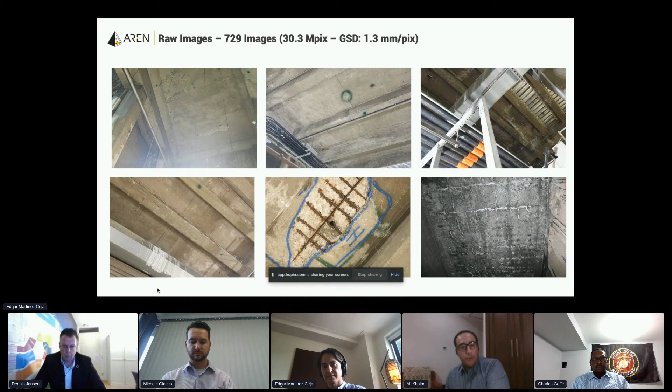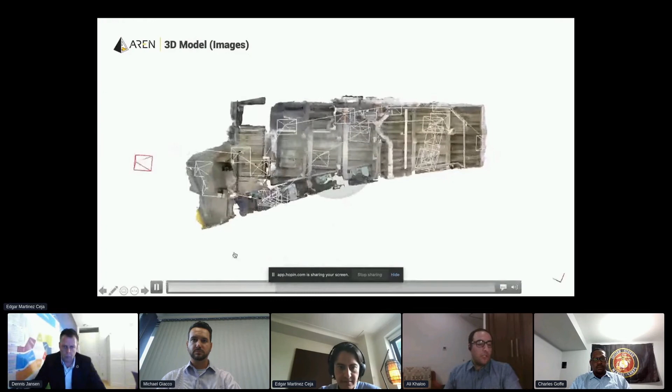So that's 729 images, which, again, as Mike mentioned, by themselves are decontextualized. You don't know where you're looking at. What you're seeing here is taking that information and creating a highly detailed 3D model of the asset. And now you know exactly, for example, where is that crack map on the asset, or where is that spalling on the asset. Now you know exactly what is wrong on your asset.

And then the next thing, as we mentioned, we are able to use different data sources just to create a more complete 3D model.

In this case, we used the laser scan data mixed with the images and created this 3D model. Upon creating these models, the next step was to apply our artificial intelligence technology to detect different damages and see which are in fair condition and which are not.

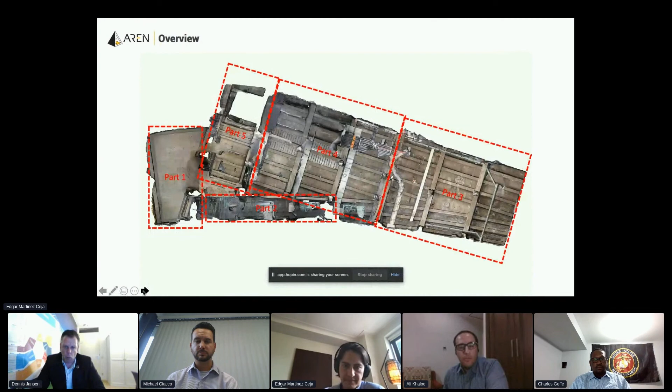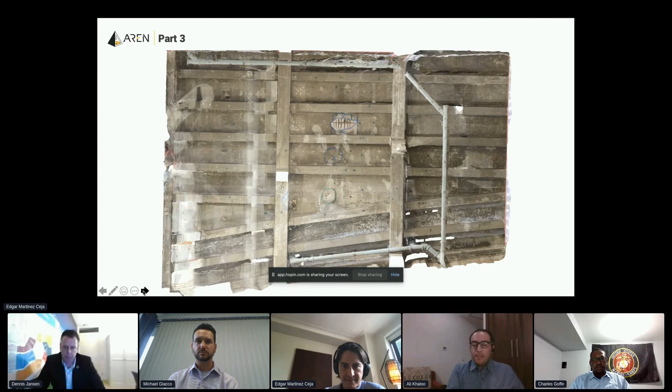In terms of how we deliver this to the client and asset owner, after creating the models we create these orthomosaics. The reason is that the final report is in PDF, it's 2D, so we need these high resolution 2D images that you can put into your PDFs.

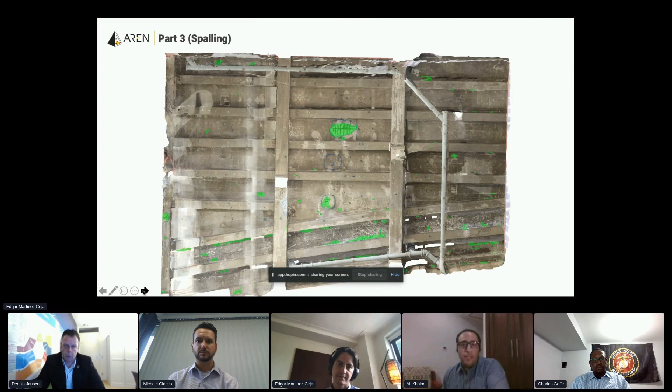What you're seeing here is us running our AI to detect different damages. In this case, it's spalling. Everything in green color is the spalling we detected using our artificial intelligence. More importantly, we're able to quantify those damages, assigning a number to each one.

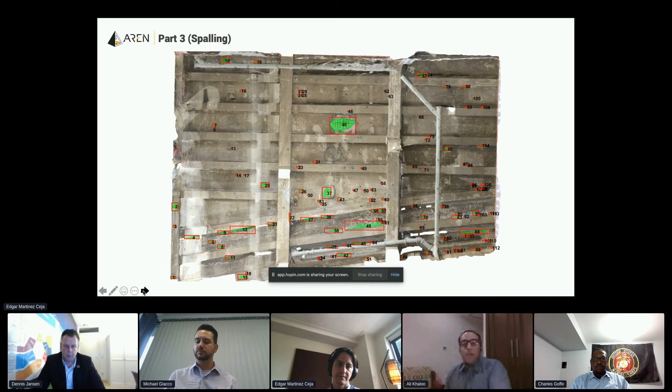We provided the client two things. One was this summary table showing, for example, the average diameter of all the spallings on that side. On top of that, we provide a detailed Excel sheet where each number we associate to a spalling is the same damage ID you find in the Excel sheet, with attributes like length, width, max diameter, and surface area for that spalling.

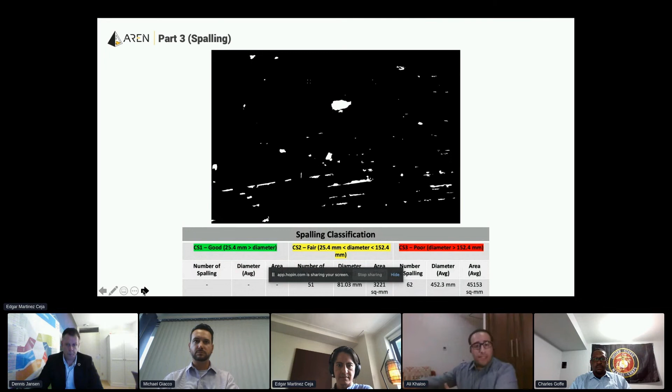We did the same thing for all the other damages, like efflorescence, cracks, rust stain, and exposed rebar. All of those damages are the ones we are providing.

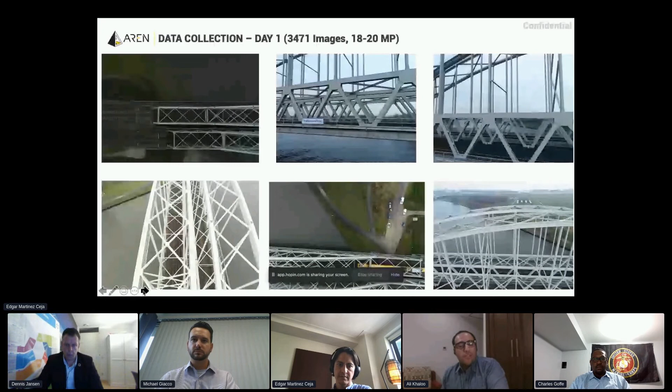In another showcase, this time we're working with the capable team of Dennis at Antea Group. This case was a bridge in Europe. What we really wanted to showcase here is how powerful our technology is to do this assessment for a larger bridge, particularly one with access issues, and how you can use this technology to move toward portfolio level asset management.

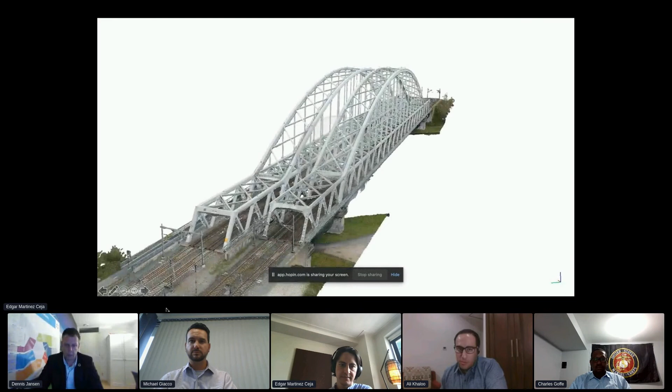What you're seeing here is the first day of data collection. In total, what we ended up collecting with our partners in Europe was more than 11,000 photos of that very complex asset, which was the double bridge. If you're an engineer having to go through each and every one of those 11,000 photos to find damages, good luck in terms of how much time you'd have to spend.

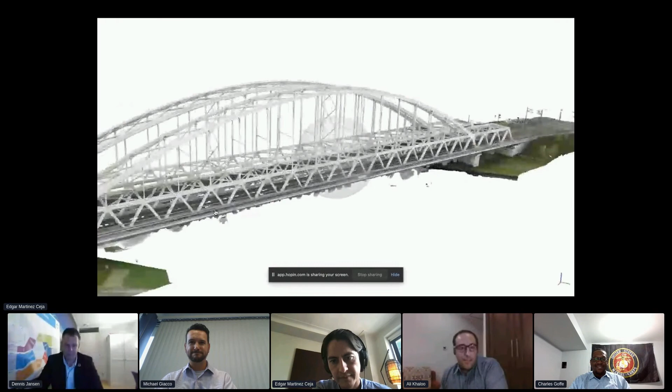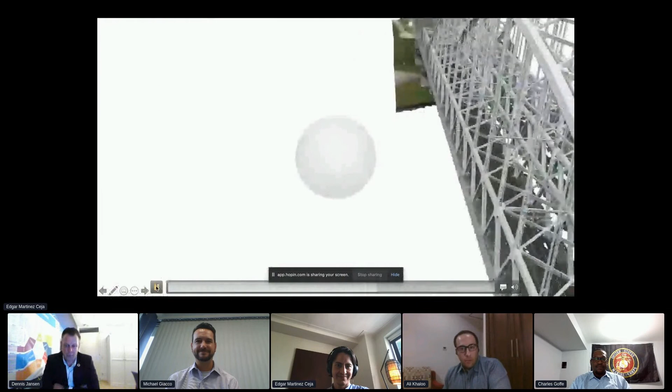So what we did was take that information and create this highly detailed 3D model that not only captures the overall geometry of the asset but provides detailed information, like the upper portion of the truss and the connections.

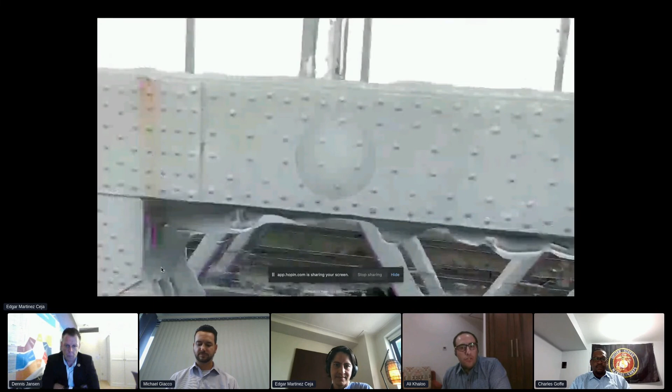Now what you're seeing here is the labeled 3D model. All those purple colors show the corrosions we found on that asset, labeled with a distinctive color. Now you can take that 3D model from wherever you are in the world, render it, and turn on and off all the labels we provided, so you know where all your damages are.

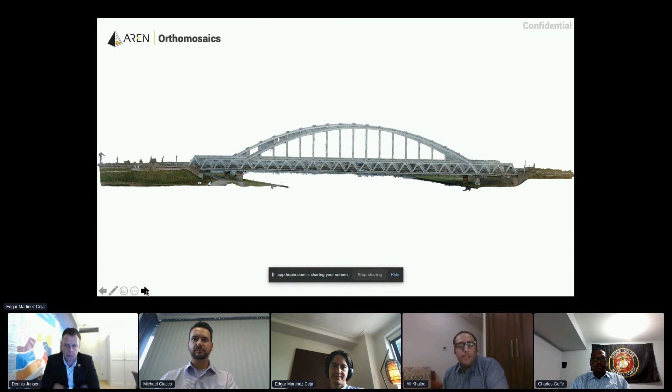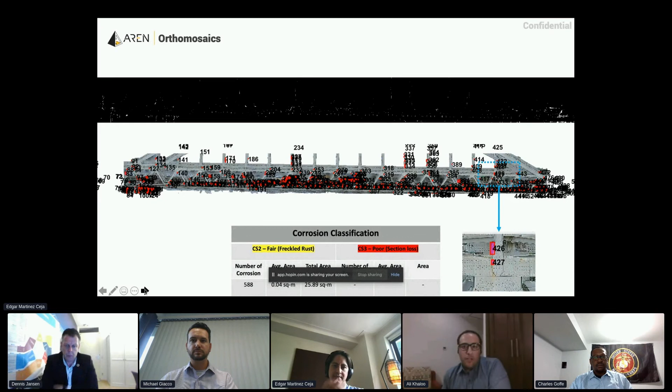In terms of how we calculate and quantify the results, what you're seeing here is the orthomosaic of one of the sides, and next we run our analysis. On the upper portion you see the binary photo, where every white pixel shows the corrosion we found on that asset. Again, we're able to label the model and the orthomosaic, provide specific numbering, and quantify how many damages there are and their measurements.

I know we're tight on time. Oh, how do I stop this? I guess, okay, there.

To wrap up, I think we enjoyed doing these projects a lot with you, Dennis, and with you, Michael and Charles. But if you have some last thoughts on how you experienced these projects, and what you think is top of mind for engineering firms or asset owners in the crowd about getting to the goal of using technology across the industry and improving the state of the industry.

Sure, I'll go first since you showed our project first. I think two things really come to mind, not just from the client's perspective, but from our perspective too. Number one, it was the ease of data collection. To Ali's point, we had simple Canon cameras, point and shoot cameras, nothing complex, no studio lighting, nothing that a normal bridge inspector would not have in his hands on a daily basis.